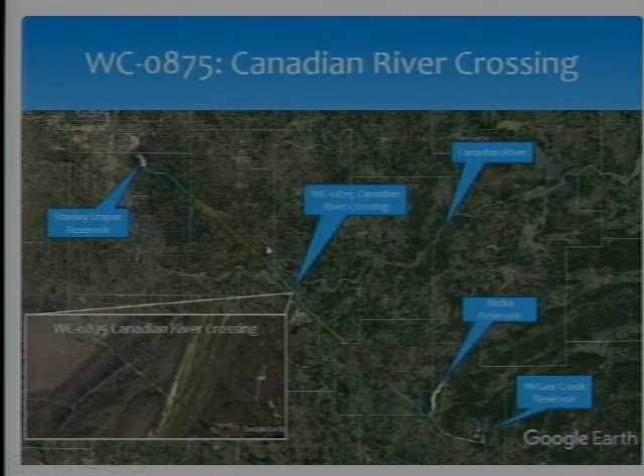We currently have 1 construction project underway, which is the river crossing. It's currently an aerial crossing for the existing pipeline that's about 2,300 feet long. The new plan is to tunnel underneath the river with the new 72-inch pipeline and a new 60-inch pipeline, so that we can abandon the existing aerial crossing. The contractor is Vadnais Trenchless Services. They got the contract for about $29 million, and we're looking at about a year and a half construction period.

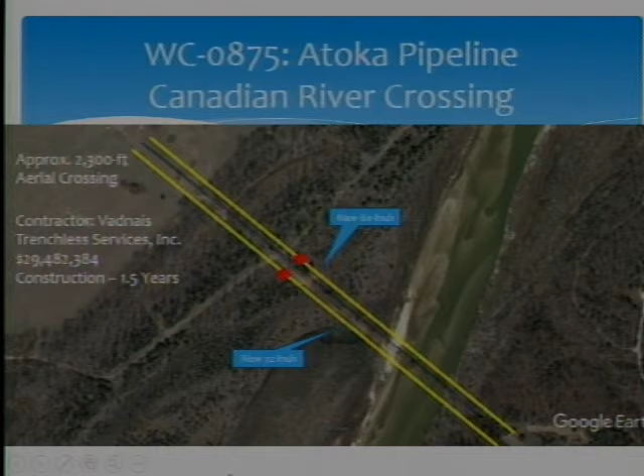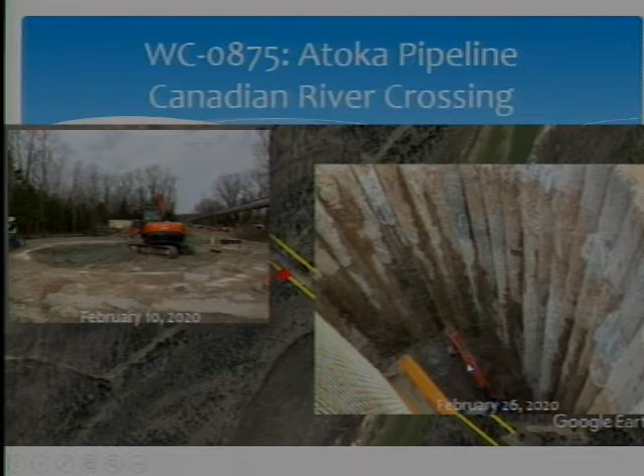In order to tunnel underneath the river, they have to have 2 central shafts where they will dig a 120-foot-deep shaft, about 40 feet wide, to put their boring machine, and they will go in both directions to install the pipe. For the shaft for the 72-inch pipeline, on February 10th they began digging after they had installed all of their piles to provide a watertight structure. By February 26th, they had reached about 40 feet deep. So I imagine about this time, they're probably about halfway down.

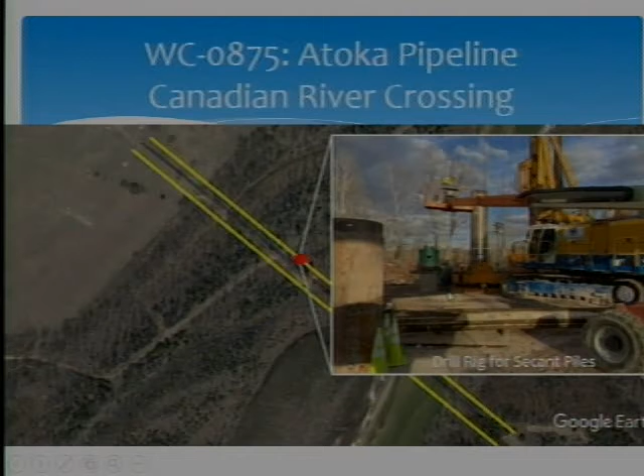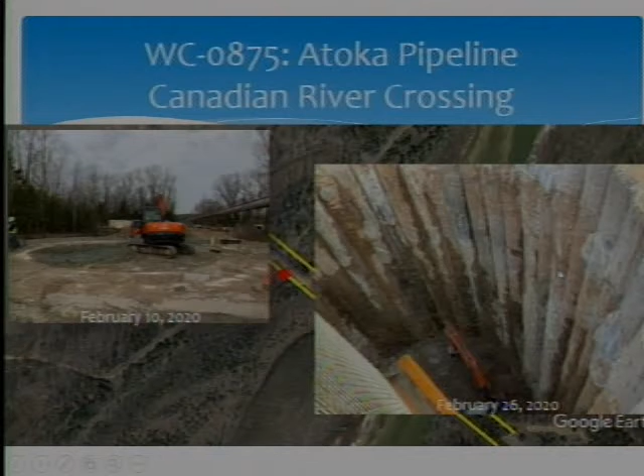For the 60-inch, they began drilling for the piles to create their waterproof structure. What you see here are the things they're drilling. They're drilling those, putting the casing in, filling it with concrete, and bringing the casing back up so that they have a complete watertight structure around them. The remaining projects are currently on hold because of, and I can't resist bringing this little critter up every time, the American burying beetle. We're still coordinating with the U.S. Fish and Wildlife for our incidental take permit.

Currently, we're set up to get our permit from the U.S. Fish and Wildlife still in mid-July. After a recent conversation we had with them, they think we're still on schedule for that. We have already purchased mitigation credits from a conservation bank called the Dirty Creek Conservation Bank, and we purchased about 97 mitigation credits, which is about the most that we think that we will have to have.

The reason why we have to go through all of this is because, as you can see, about half of my pipeline is within the American burying beetle conservation area, and almost 80% of the pipeline falls within the ABB range. And just for a location reference here, the Dirty Creek Conservation Bank is located right up here. So what they do is they set aside land for us to maintain in perpetuity to help encourage beetle growth and health.

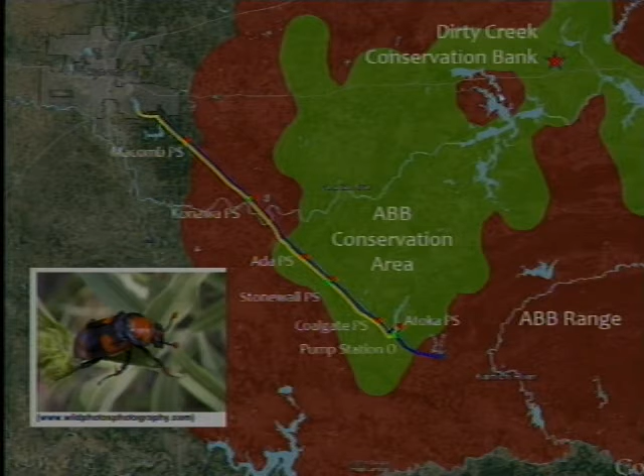And I can answer any questions related to this one if you wish. Are there any questions? Thank you, Larry. All right.

Mr. Chairman, just so you know, we started this permitting process back in 2015. And we have been working diligently with the Army Corps of Engineers and U.S. Fish and Wildlife, and we thought we were going to be able to begin physical work on the pipeline last year. Fish and Wildlife has decided they're going to give us a single permit for the whole run instead of individual segments as we have it designed.

They feel that we would have a better chance with this individual permit for the whole job if we were to be sued than if we did segments individually. And so that's why it's taking until the end of June, maybe early July, to get this permit in hand. So we're about 2 years behind schedule on the construction of the pipeline, but we hope to catch up as we go through the construction process. So I just want to give everybody an update.

Secondly, we were planning to start at Lake Atoka, the first segment, but we found a prehistoric Indian village right in the middle of our construction area, and so rather than mitigating that archaeological site, we designed around that site. And so now I believe we have all the easements in place, and we're in the process of getting the updated permits so that we can actually build without interfering with the prehistoric village. So that's a summary of where we are on getting the project further along.

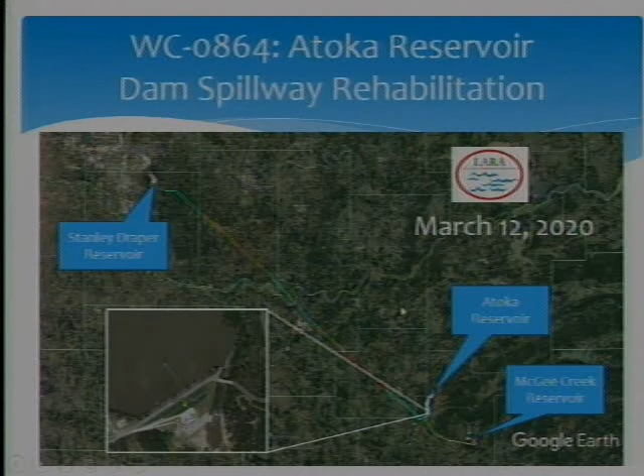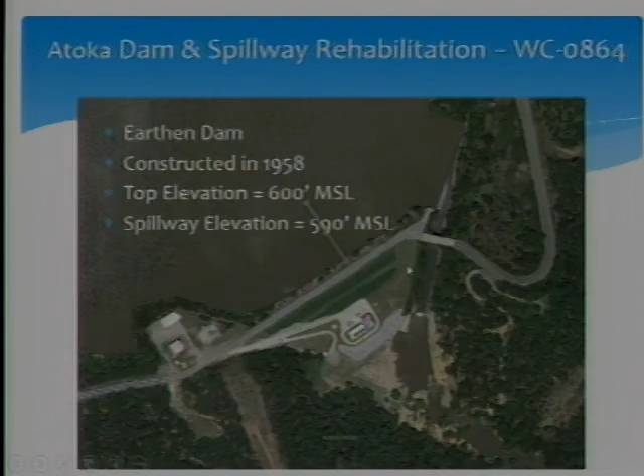This is a little history about the existing dam spillway. It's an earthen dam constructed in 1958. The top of the dam is elevation 600, and the spillway elevation is elevation 590. Through our construction, we'll be raising the top of the dam elevation from 600 to 607, but the spillway elevation will remain at 590, so the water level will not be changing there. So this is the aerial picture that I show every time we talk about this from the north end looking kind of towards the south.

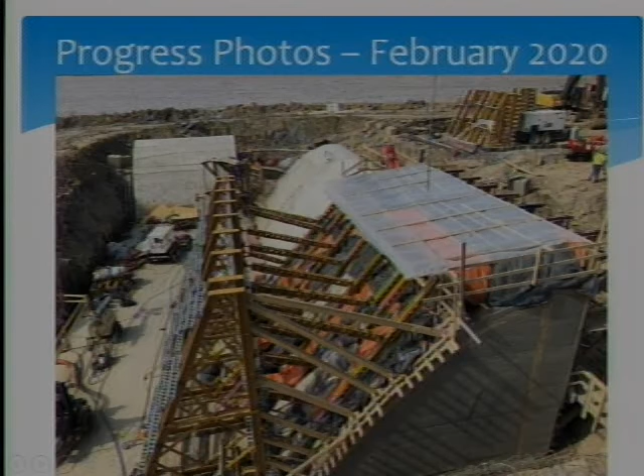The curve that goes along the 90, as well as the curve that comes down the ogee face itself. So to make that, we use these special styrofoam forms that go together like a puzzle piece. You can see them here. They're coating them with anti-adhesive so they don't stick to the concrete, but they go together just like a puzzle piece, and they go up in sections here.

You can see this detailed form structure here that go up usually in 36-inch, 3-foot lifts. They pour a section, and then they'll put in another section of the puzzle, and it'll continue up until we get to the top.

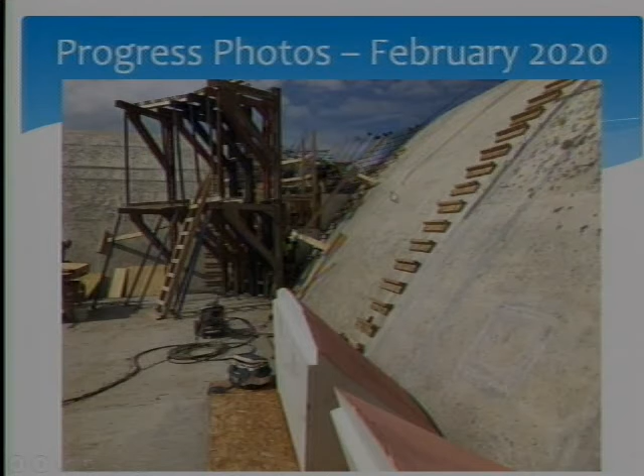Here we are getting completion of the Phase 1 chute walls itself. You can see this wall is almost 30 feet high, and so this guy here is just doing some final touch-up and curing of the face itself. And so once we get to the end of the month, hopefully we will then start being able to use this as the waterway.

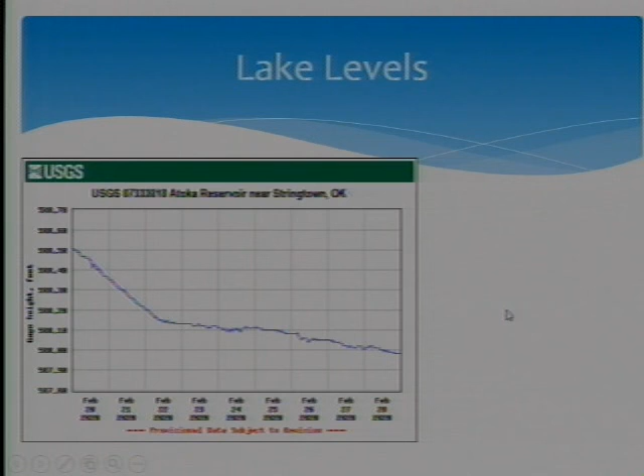Lake levels, Dustin Seagraves gave a little bit of an update on the lake levels. Over the last few months, we've had several additional feet of water coming over the spillway section. And you can see we've been trying to maintain that as best we can through the temporary chute, trying to keep it at 585, as Dustin talked about earlier.

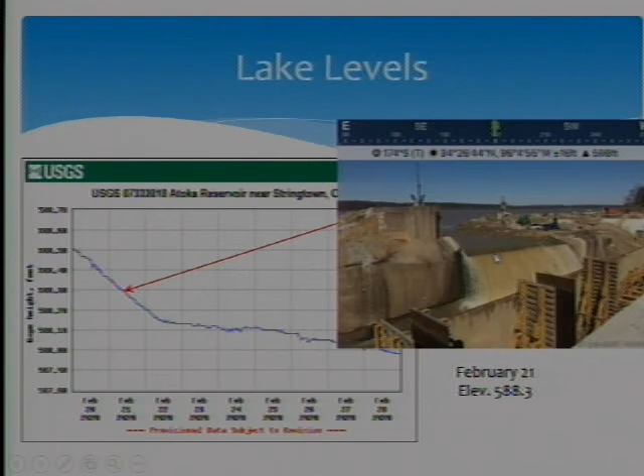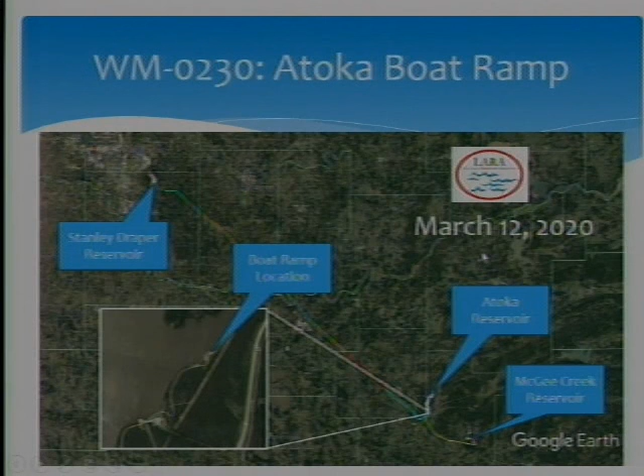Moving on from the spillway project, we'll move to the Atoka boat ramp project. We are working on this project in coordination and agreement with the city of Atoka themselves, and we did our first bidding of the Atoka project. It was advertised by the city of Atoka in some of the regional papers in Atoka, McAlester, and Ardmore on January 15th and 22nd. We held our pre-bid meeting down at the city of Atoka on January 29th.

We only had one attendee of that pre-bid meeting, and he was a sales representative of Miko Sullivan, who is the manufacturer of the floating boat docks themselves. And subsequently, we did not receive any bids when the project closed in February. So we've gone back and we've made some additional communication efforts to talk to contractors in the area to see if they have any interest in the project, and some of them do. And so we have now re-advertised the project.

Yesterday, again, in coordination with the city of Atoka, we had them re-advertise the project in regional papers like we did last time, including Durant this time, I believe. We've also tried to put it in the Journal Record, which is a large advertising paper in Oklahoma that a lot of contractors look at, as well as our architect, TAP Architecture. They also placed the advertisement on internet-based forums like the Dodge Report and iSqFt, those type of places where contractors can look on the internet to see advertisements, and hopefully we can get a little bit more interest in the project.